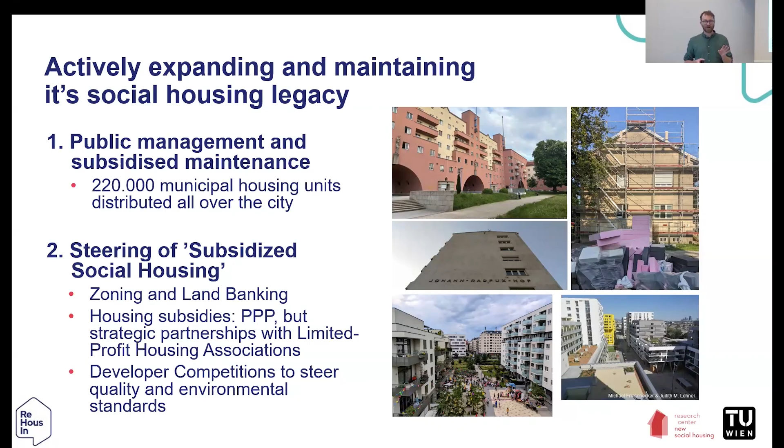And besides zoning and land banking, as said, housing subsidies are an important element in this, but also the developer competitions, introduced in 1995, to steer the quality and the environmental standards of subsidized housing developments. So this is really a very brief summary of the main policies.

What we can also see in Vienna is that the regulated private rental market came under pressure. This goes back to the 90s when the rent control on the national level was deregulated and a reference rent, value rent, was introduced. But it's also important to understand that the rent control in Vienna only applies to the housing stock that has been built before 1945,

roughly. So this is where the rent control applies, and this has been undermined by the allowance for time-limited contracts for 3-5 years, and also for surpluses, for instance, for location. So this undermined this very strict rent control system because tenants now need to go to court and legally challenge if their rents are adhering to law.

So actually, the tenants need to take care of that. But they are supported by the city of Vienna to a large degree with counseling, which is offered free. What is also important to understand is that the tenant security regulation, so how to exit the contract, still applies to the whole private rental segment. So there's a basic regulation of the whole private rental segment.

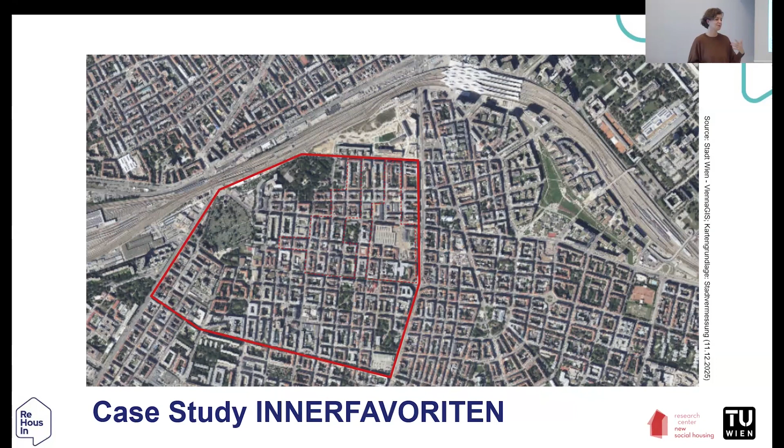And if we now look into this existing structure, it's very important to understand how the urban renewal process in the city of Vienna and in this area was actually happening. If we look towards urban renewal, renovation procedures, and retrofitting, as we call it today, it's important to understand that Vienna introduced an urban renewal program already in the 1970s. It is based on the Urban Renewal Act, and it focused on the huge housing stock that was dilapidated and, as we call it, substandard.

So there were no adequate facilities within the apartments, no running water, no bathroom facilities, sometimes no heating. It's very important to understand that almost 40% of the total housing stock needed urgent strategies of repair and renovation in the 70s. And the city of Vienna then developed an urban renewal strategy called soft urban renewal, because it was important not just to improve the physical housing stock, but to also keep in mind the soft measures that would prevent displacement of the existing inhabitants and tenants in the buildings.

So within 10 years, there was a long procedure of developing the soft urban renewal strategy that on the one hand focused on improving the housing stock, but on the other hand also focused on public space, on green areas, and also on participatory measures.

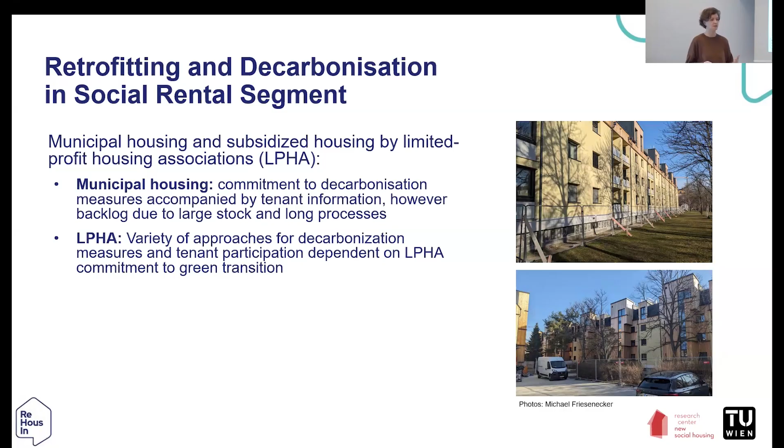In our interviews with different limited housing providers, we saw that there is a huge variety of approaches when it comes to decarbonization measures, and also when it comes to tenant participation. There have been some limited profit housing associations that have a really clear and long-term strategy for what they do with their housing stock in order to reach decarbonization aims. On the other hand, there are other limited profit housing companies that are at the beginning of developing such strategies and processes. So the commitment to the green transition actually depends a lot on the different limited housing providers.

What is actually true for both actors is that decarbonization strategies highly depend on subsidies. There are legally mandatory reserves for renovation measures, but the problem is that these reserves are usually insufficient to manage additional decarbonization or very comprehensive retrofitting procedures. And this makes it very difficult to deal with in a financial aspect.

The other one is that the principle of cost-based rent for the limited profit housing providers only allows additional costs to be included in the maintenance and improvement contribution, which is also a legal instrument, and it can be asked from tenants through a legal or voluntary procedure, which is not that easy and requires quite a lot of effort from the side of the limited profit housing associations.

And then what we heard also in the interviews is that the tenancy law restricts the implementation and construction work on a larger scale, since the tenant does not have to allow workers, for example, to enter the apartment. So the whole complex can only be renovated when apartments are empty, and this takes a long while because all of the tenancy agreements in the municipal housing and in the limited profit housing associations are long-term lifetime contracts.

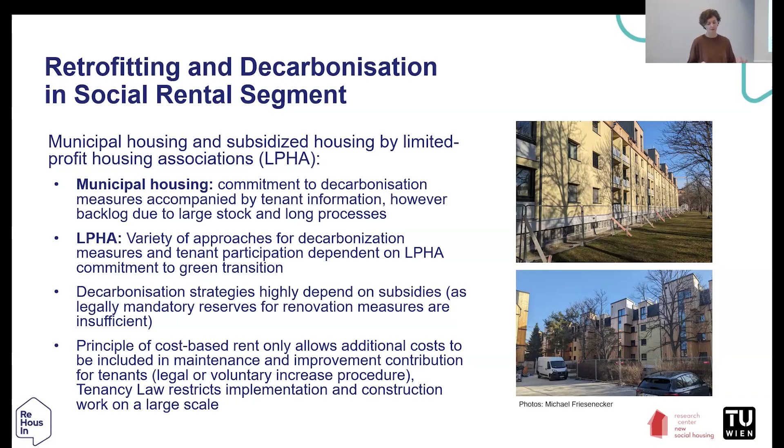If we now look into the private rental sector and the ownership sector, it's a bit of a different setting, and it's also a very diverse setting. If we look into the Innerfavoriten area, we see on the one hand the typical structure of the Viennese historic building with tenants inside, so private rental apartments. But there is also an increase in the last couple of years of owner-occupied apartments and condominiums, or the conversion of these historic buildings into condominiums.

I will now give a bit of an overview of the different views of the actors we talked to within the private sector and the historic buildings. On the one hand, when we talk to real estate developers, they discuss the restrictive policies on demolition and attic conversion when it comes to densification, and that they would prevent financing decarbonisation and greening measures, to guarantee also that the rent caps that Michael has talked about can still be in place for sitting tenants. So there has been a tension, since these densification measures would actually allow for decarbonisation to be financed, from the view of real estate developers.

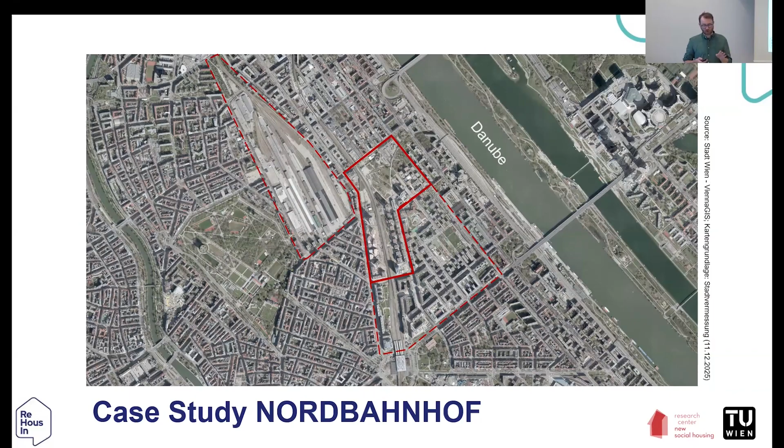And what we have looked at actually is a third round of development. So what you can see is the one in the middle that is not with a dotted line. The dotted lines in the east are the first developments, and on the other side, it's a development that is following, that is still one of the latest, largest inner-city railway areas being developed. But why we have chosen this particular area, this third development, is because already it was a revision of an urban design concept.

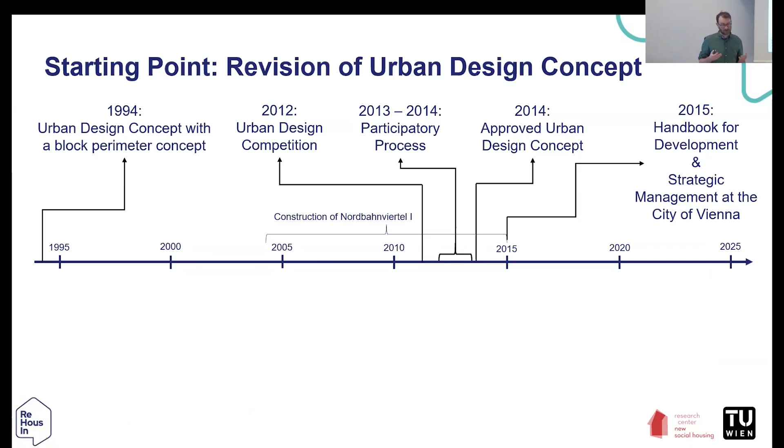So the concept foresaw a huge area in the middle which is free. It's called the free center, or the freie Mitte, and it should be used as an urban park, a green space, an open space. While at the edges of this free center, the housing should be concentrated, but in a more densified manner with high rises and higher buildings.

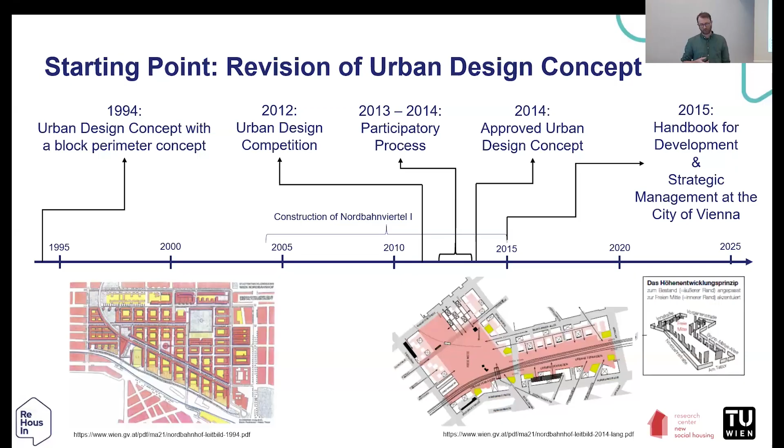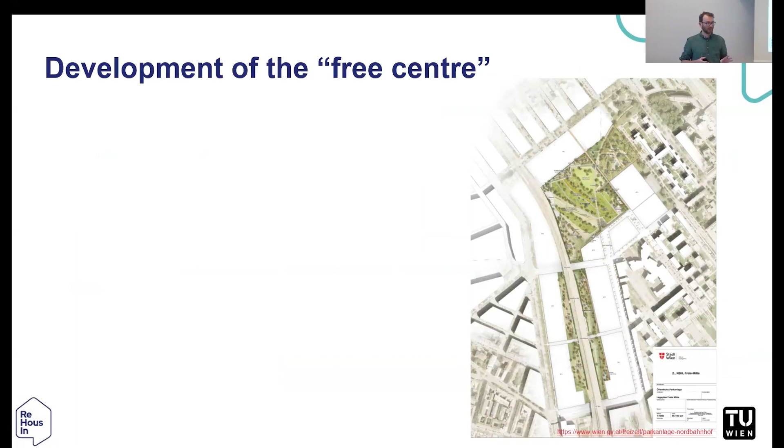So I now want to first go a bit more into depth into the development of the nature-based solutions of the free center, this urban park, and then afterwards go more into depth into the edge, the built environment that has been planned around this free center.

What the revised concept argued for is that the savings in road construction, when you think of this block perimeter organization, can be invested in establishing this big park, which is 10 hectares of green space, and obviously some parts needed to be cleaned up, and the savings could also be invested into maintaining this green space.

So after this process of developing the urban design concept, some detailed landscape planning concepts were developed in the years 2017 and 2018. And there were also some additional participatory elements.

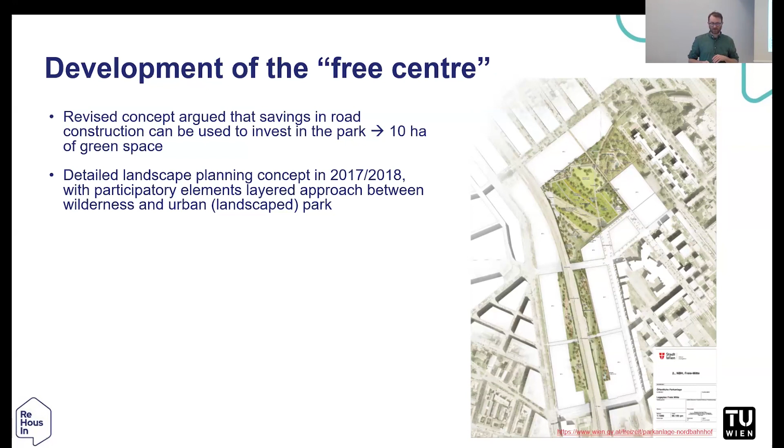And the outcome is a rather layered approach that tries to be something in between, with some areas left more wild, some wilderness areas, more in the north of the picture we see here, and some more urban park-oriented landscaped elements in the south and at the edges. So the outcome looks like a compromise in the end, with different elements being located and embedded within this big open space.

But within this role, there was also a crucial role of residents and neighborhood initiatives that always, at least according to the information we gathered through the interviews, demanded coherence with the urban design concept, which already states this preservation of wilderness, and also using these historic landmarks, like the railway tracks that are still present there, and other elements that stem from the era of a former railway yard, which some other concepts declared should be completely removed and redone.

So it was a balanced approach to work with the elements that were already there and also with the nature that developed within this vacant lot. And there were also some issues argued by officials that, because of liability issues, for instance, the railway tracks couldn't be there. They should be removed. So there were always ongoing negotiations, and the neighborhood initiatives and the residents were crucial in preserving this and making it happen in the end.

So this also reflected some administrative challenges within the city of Vienna. And this starts with how to zone this area, which is more wild, more nature oriented. So they were debating, should we zone it as an urban park? Or is it something more oriented to nature protection categories? So in the end, a very specific category was invented, called nature and recreational space.

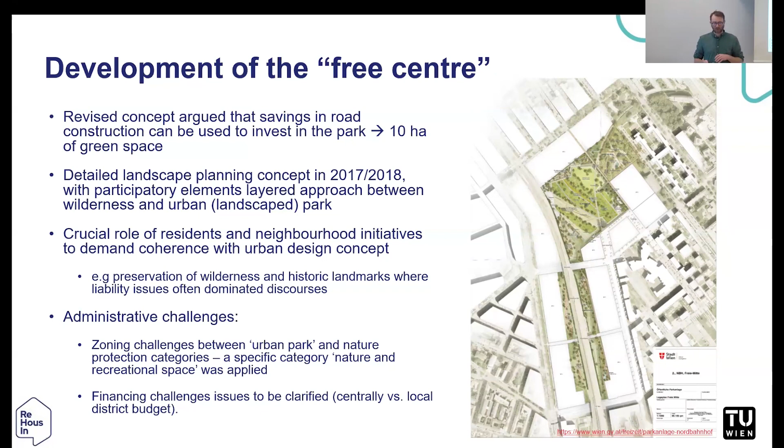Okay, I now want to focus on the built edge and how the housing was developed there and how the land was put forward for this housing. So in 2016, the contractual foundations were laid, and this was done by a framework agreement between the city of Vienna and the Austrian Federal Railways, which were then still the property owner. And there were issues like financing social infrastructure in general. There were also some regulations put in place about affordable housing or subsidized housing, what the amount of it should be, and so on.

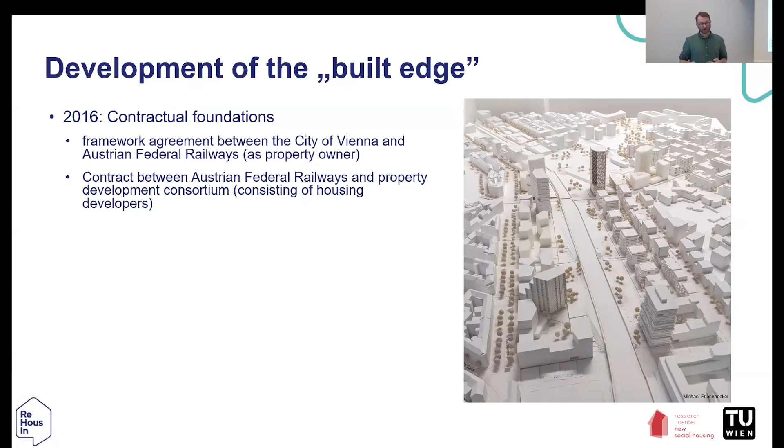And then as a second part, there were contracts between the Austrian Federal Railways as the property owner and the Property Development Consortium, which consisted of different housing developers, an insurance company and non-profit housing developers, so quite a mix. But learning from previous examples like the Hauptbahnhof, which was already mentioned by Judith, the Austrian Federal Railways were interested in selling the land to a consortium and not to individual housing developers. And they did it lot by lot. For them, this was a learning to rather have one board or consortium that you can deal with instead of a myriad of housing developers individually.

So after having laid those foundations, the development started with detailing the property developments for 8 building lots. The consortium gradually buys or acquires land from the Austrian Federal Railways. So there are still some lots that have not been sold to date, but are still in the process. What the development entailed was first to create a detailed development structure for these 8 building lots. And this also led to some renegotiations of where the high rises should be located.

So in comparison to the concept, which foresaw 8 high rises, the number was lowered to 6, because the developers realized that this was not so easy to do within the funded, subsidized system they should operate in. So there were always these negotiations with the city of Vienna, in a very constructive way, to reorganize the building lots.

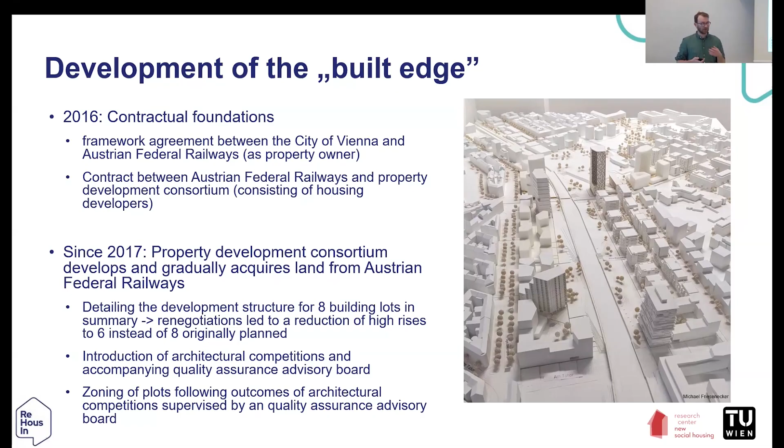So what was the outcome, or what is being built today, is a mixed housing tenure. The aim was to have a mixed tenure for the whole Nordbahnhof, which is 1/3 free financed, 1/3 affordable rent, which is a specific rent agreement that was also developed during this process of development. This is a negotiated agreement with the city of Vienna on a rent cap that is slightly higher than the classic subsidized rents.

This is indexed with 2017 and is slightly higher in high rises because there the maintenance costs are more. But still it was important also for the housing developers to offer unlimited contracts. When entering such an affordable rent agreement, they have a running time of 20 years. For these 20 years, the housing developers need to adhere to these affordable rents. They can only be changed afterwards, after these 20 years, but also only when the contract will be renewed for the tenants.